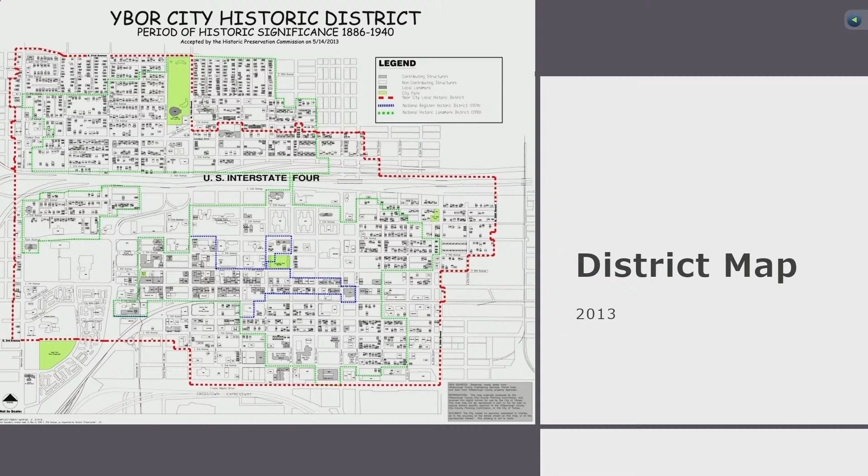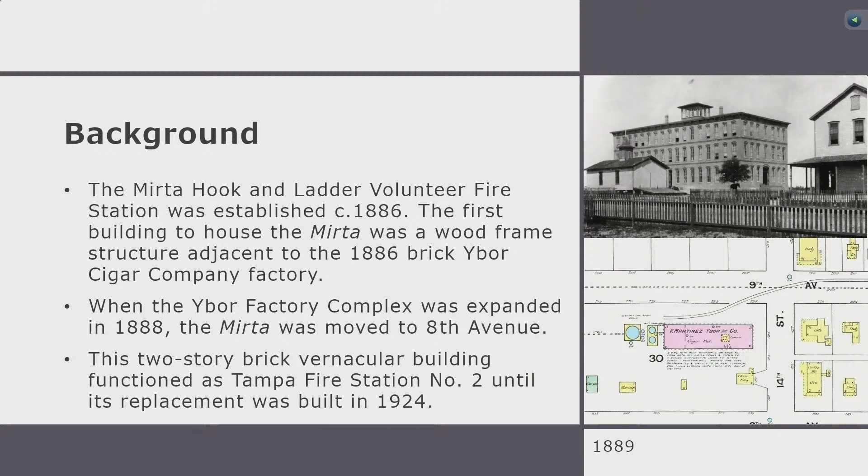When the Ybor factory complex was expanded in 1888, the Mirta was moved to 8th Avenue. This two-story brick vernacular building functioned as Tampa's Fire Station Number 2 until its replacement was built in 1924. It was later used as a cigar factory and warehouse, and Fire Station Number 2 is significant as the oldest remaining and only extant 19th century fire station in the city of Tampa.

And that is this month's preservation progress. You can also see it in our Tampa Bricks and Mortar newsletter if you want to read more about it as well.

I don't think it's by coincidence that that fire station was located right across the street from the Ybor factory complex. It was by design, so they wanted to make sure that that was taken care of.

With that, we can move on to conflicts of interest and ex parte communication, and I'll ask our legal counsel to lead that discussion. Hi, Dana Crosby Collier from the Legal Department. This evening, I'd like to ask if any member has a conflict of interest with any item on the agenda tonight. No. Okay, great. And has any member had an ex parte communication regarding an item on the agenda? I have not. Okay, thank you very much.

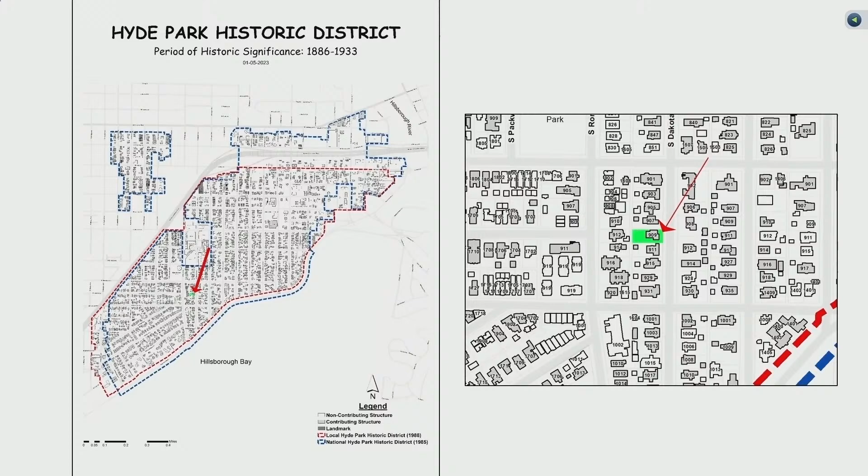909 South Dakota is located on the west side of Dakota Avenue, mid-block between West Morrison and West Watrous Avenues. The property is a contributing structure to the Hyde Park Historic District. From the 1929 Sanborn map, this shows the original footprint that has little change, and the original accessory structure, which has been demolished. You'll also notice that it has the open alley, which remains open today.

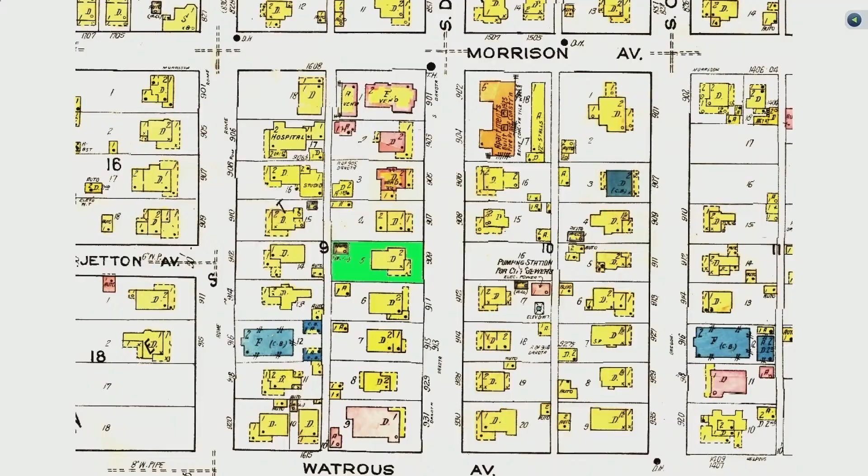The applicant will review the request for the ad valorem tax exemption. If you have any questions, I'm here to take them.

Good evening, Commissioners. Jim Lloyd with Lloyd Craftsman, representing the homeowners, my clients, Andrew and Kim Cox at 909 South Dakota Avenue. Appreciate you coming out on this nice dry day for this packed house. We've got a pretty good candidate here, I think, for the tax exemption.

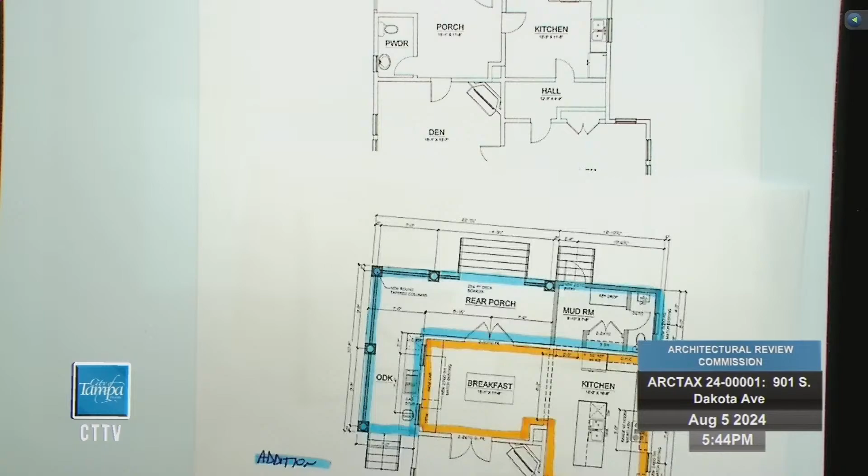Pretty standard layout. This is the proposed floor plan showing the area in orange that's going to be modified. So the kitchen will essentially stay in the same location, but just be enlarged. The back porch that's open right now will be enclosed and will become a breakfast area. And then there's a small addition for a mudroom behind the kitchen, and then a rear porch for them to be able to hang out on the porch, and a small outdoor kitchen on the south side of the home.

Excuse me, that's the existing second floor. Again, pretty standard layout. This was a sleeping porch that's been enclosed for another bedroom that was already there.

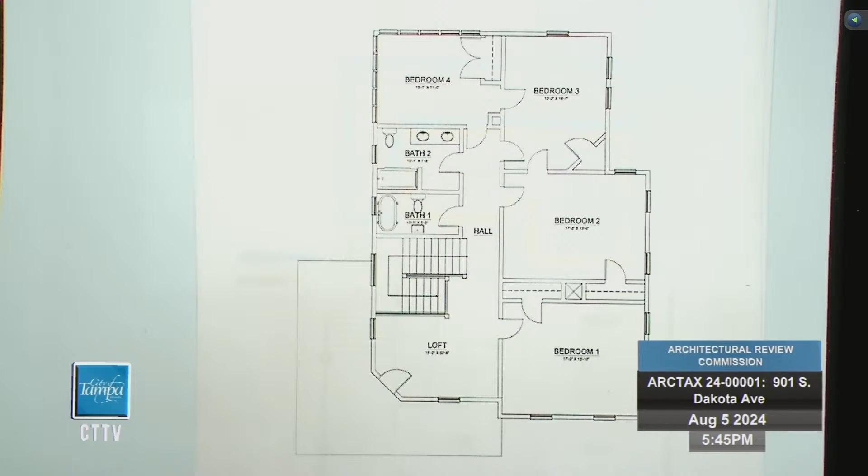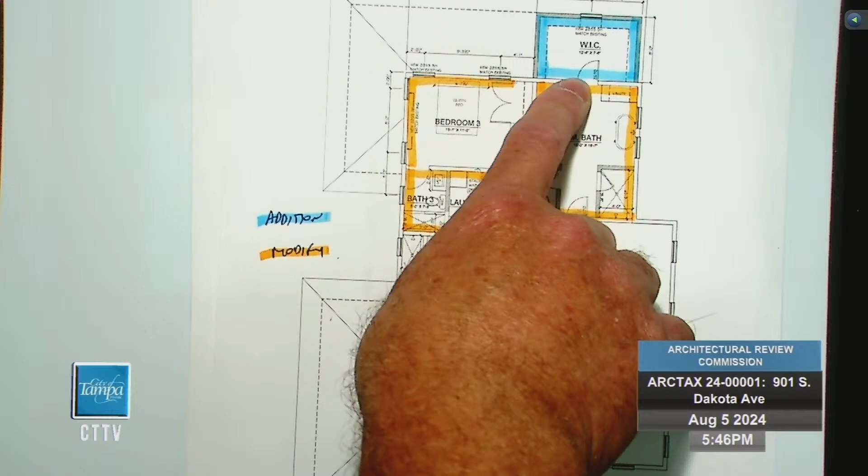And then this same thing, this is what's proposed for the second floor. Utilizing there's a bath and taking a little bit of space out of this room right now to create a laundry room upstairs. We are taking a couple of the windows out from the sleeping porch, but still keeping the exterior look of those windows just to be able to have room for a bed and a dresser in that room. The one bedroom is going to get modified for the bathroom, and then above where the mudroom is, there's going to be a walk-in closet on the second floor.

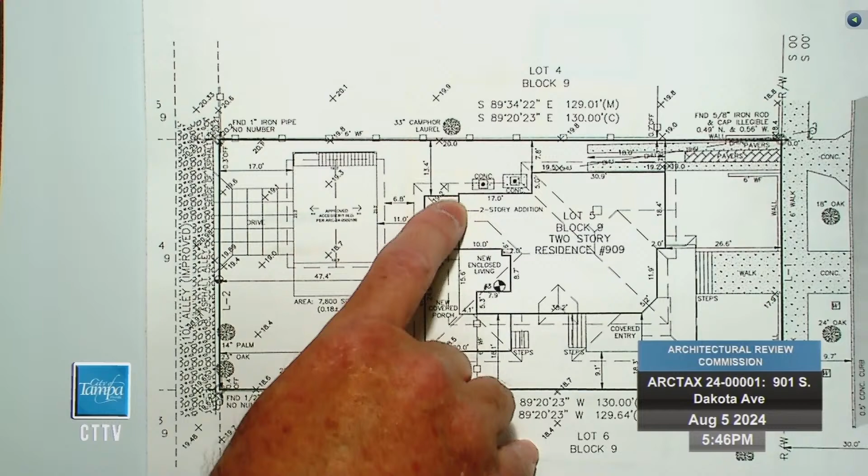Site plan. This is the proposed site plan showing the accessory structure that was already approved, the addition here that's already been approved, and how those interact. Shows the notch where we've taken where the addition is, so we can delineate new from old on this particular structure.

This is the front or east elevation, existing and proposed. Not a significant change. The only thing that we've really done differently on this is remove this door here and placed a window in its place, same scale and size as what is next to it on the second floor, as well as lining up with there's an existing window on the first floor, so they'll match each other. And then they are going to potentially utilize some space on the third floor eventually, so we did add some fenestration on that.

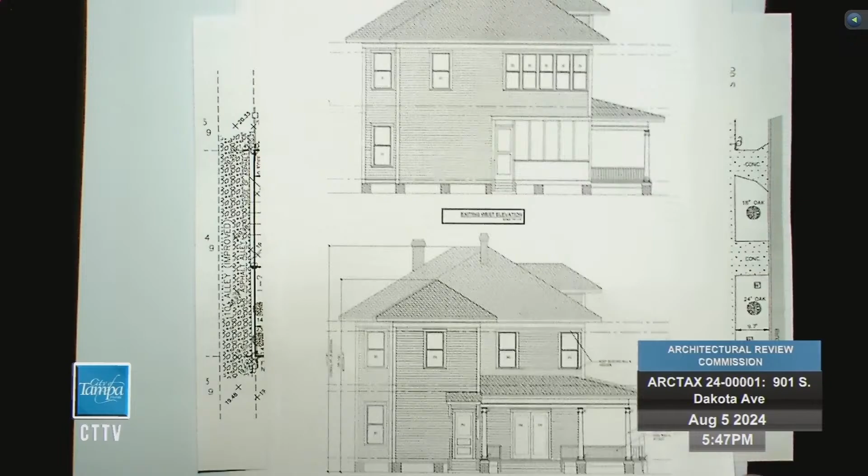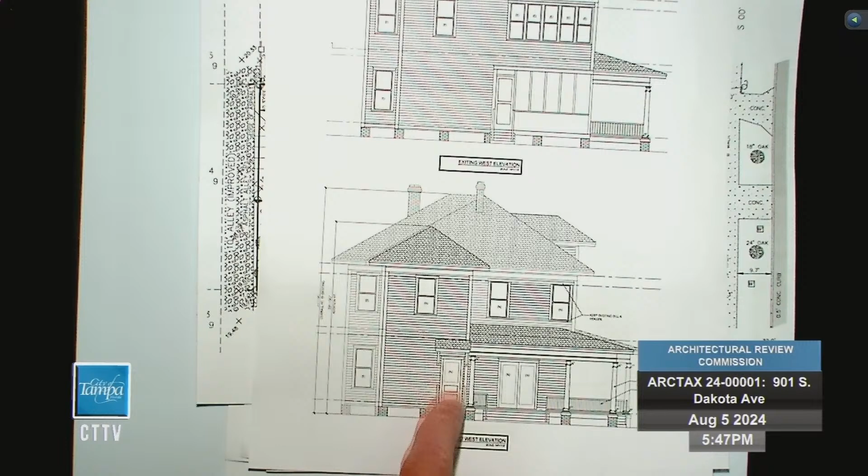The rear elevation, again, going from the sleeping porch to the bedroom up there. This is a sill that's going to be continuous, so it'll keep that detail that's there, but then we'll just fill in between there with siding, and we'll be putting new JELD-WEN wood windows in to match the existing residence. And then there's some details showing the rear porch, the entry door that's coming in off the mudroom, or that's going out to the mudroom, and some French doors coming out from the breakfast area onto the porch.

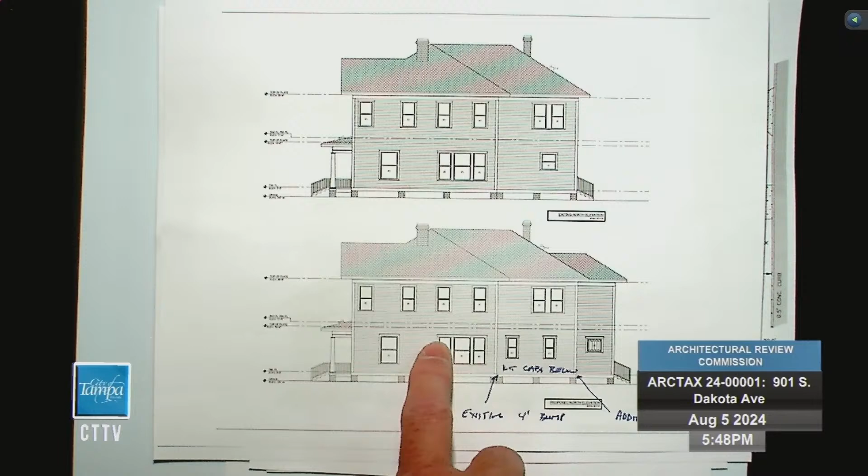And then this is the north elevation. Again, showing basically everything staying similar to what we've got. They are mimicking there's a window that's on the south elevation that they're going to mimic in the mudroom, just to give them a little bit of light in there. And then there was some discussion at the last hearing about the size of these windows, but there are kitchen cabinets below. The headers do line up. This bump out is, or this bump in is actually 4 feet behind this wall here. And then again, the addition has the additional 6-inch offset.

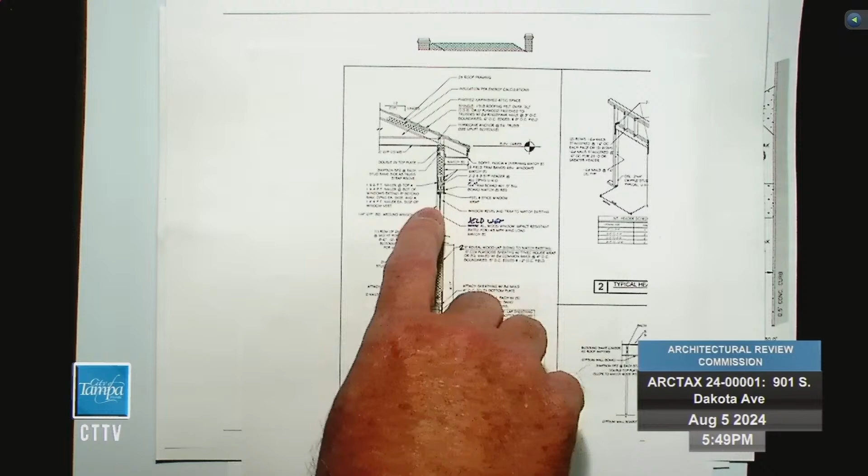There's a section view. Again, showing the enclosed soffit to match existing. The engaged windows, JELD-WEN wood window. It's a 2.5-inch reveal Dolly Varden square lap siding. That will match a 1-inch by 4-inch trim band going around all the windows, and then the corner boards showing the same thing on the first floor as well. So that's all mimicking what's on the existing home.

All right, so some of the details of the home.

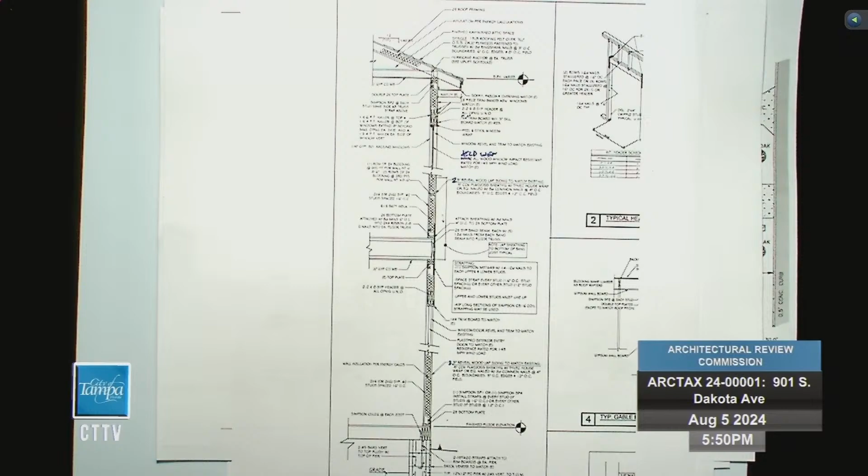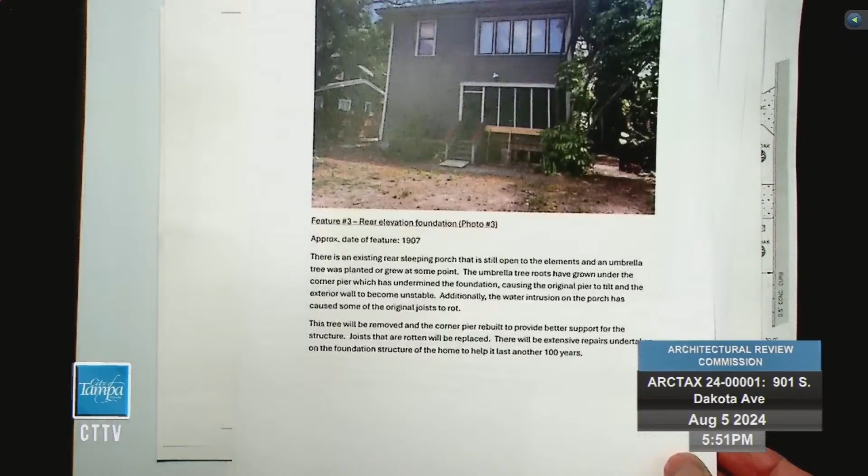The rear of the house. It's an existing sleeping porch, still open to the elements. This umbrella tree is going to be removed so that we can do foundation work there, so that we're not having any issues with it.

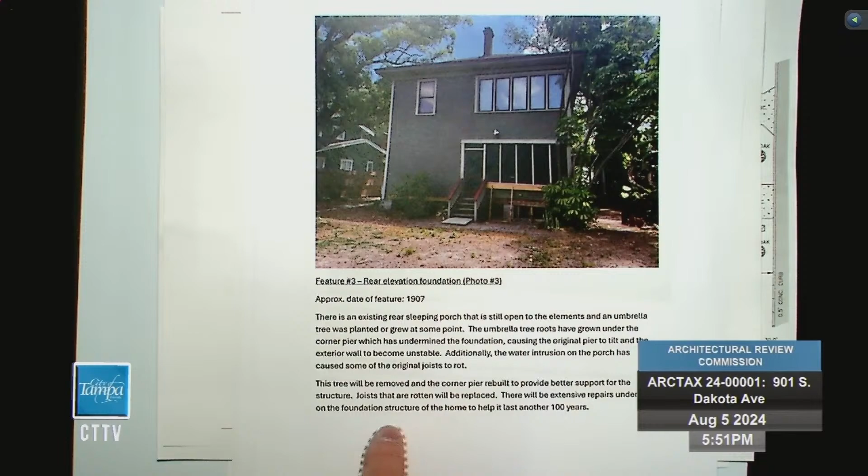There's actually a kink in the house right now creating a situation, so we're going to repair this corner of the house, the structure there, to shore that up. Some of the existing joists have rotted from water intrusion on this porch because it's screened as it is. So we're going to be repairing all this and taking care of whatever foundation work we need to make the home last hopefully another 100 years.

These are the existing original windows on the house. Most of them are original, and a lot still have the original wavy glass. These are going to be rehabbed and made operational again. Any sashes beyond repair will be replaced with new cypress sashes of similar dimensions, so they'll look the same.

They'll just be new and will last a little bit longer, hopefully, than what these had. But most of the windows there are actually in pretty good condition.

This is the door to nowhere. We've discussed this in the past, but we are going to take that out and replace it with a window. You can see the head height doesn't match the original house. It's debatable whether that was added or not, but this window we put in here will match the others that engage the frieze board.

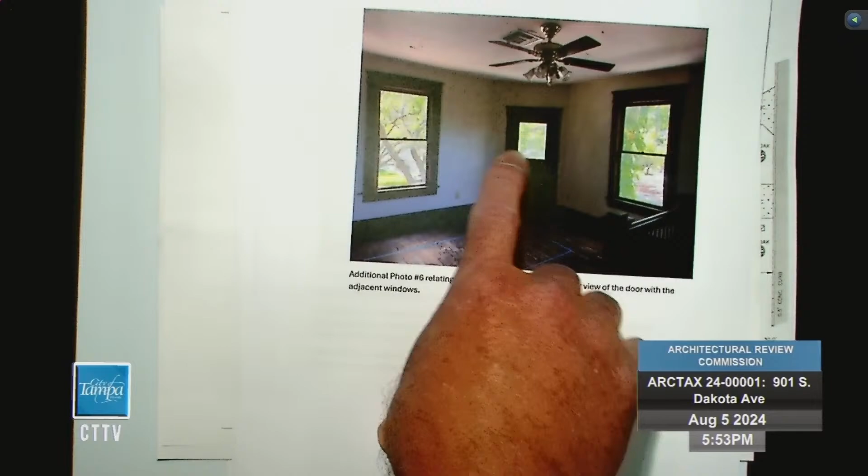Moving interior. That's just another photo from the inside, so you can see how this looks a little off here because the window height doesn't match the door height.

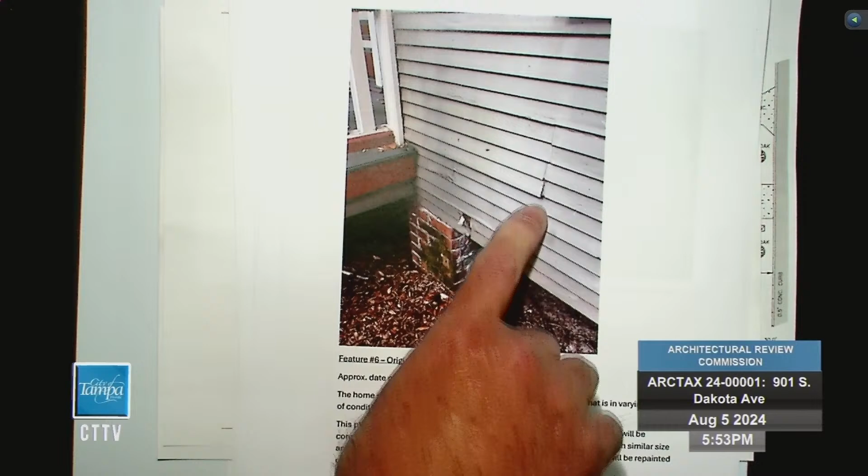This shows the original Dolly Varden siding, 2.5-inch square lap siding. It's in various condition, but this is a commodity item that I can get. We'll be rehabbing as much of it as we can, scraping down, cleaning up, fixing, and repainting. But if it's not in good condition, too rotted, we can get matching siding that'll go right in, and you won't be able to tell it's been replaced.

There's also some foundation work that we're going to need to do. That's the original brick piers that we're going to replace with additional brick piers, and that'll match on the additions as well. We'll be doing the same type of brick there.

That's the original heart pine flooring. This is the first floor, which is surprisingly in better condition than the second floor. So this can be refinished, and then what we're going to end up doing with the second floor...

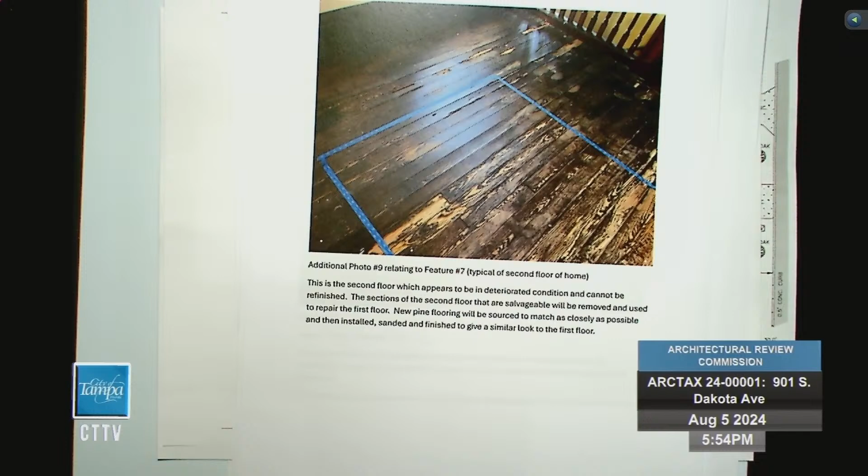There's some other photos of it as well. It's been patched over the years, so it's not in great condition. So what we're going to try to do is salvage whatever we can from the second floor and use it for patches on the first floor, because that will match.

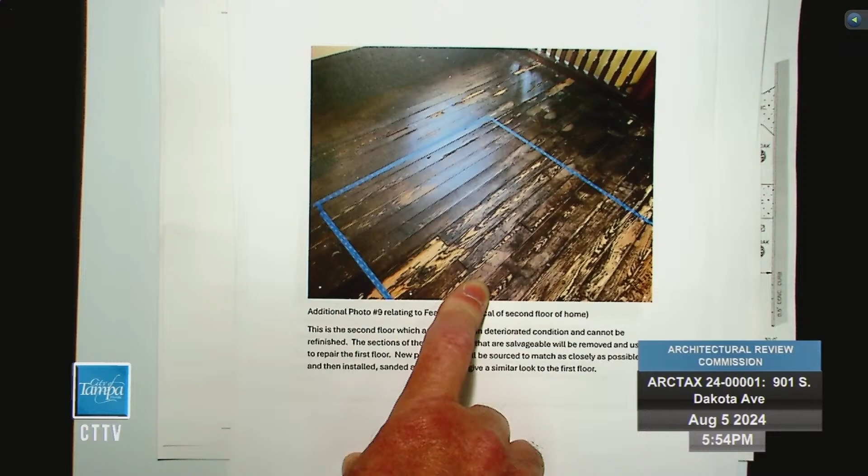Then we'll source additional heart pine flooring for the second floor and just replace that whole thing, because there's enough termite damage in the wood that it's going to need to be done. So we won't be able to salvage everything from up there, but we'll save as much as we can from that second floor and use it on the first floor.

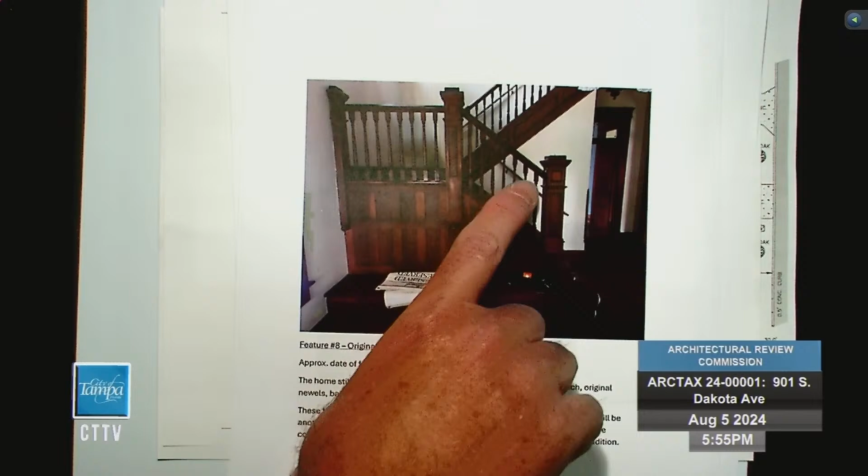This is probably the coolest feature in the house. It's a pretty spectacular stairway going to the second floor with paneling details, paneled newel posts, some really cool detail balusters, and a big fat handrail, which is typical of those homes in Hyde Park.

So this will all be refinished and refurbished, and we are also going to recreate that same look going from the second floor to the attic space. There'll be a switchback stair on the second floor matching these details to get up there. The third floor attic space is going to just be kind of an open room right now.

There's enough space to be able to get up there, but there's not a plan for any kind of detail as far as what's going to be up there, but we do want to be able to put the stairs in there now for future use.

There's another detail on that showing treads and risers, and then another shot of the balustrade. This is the balustrade on the second floor, overlooking the stairway.

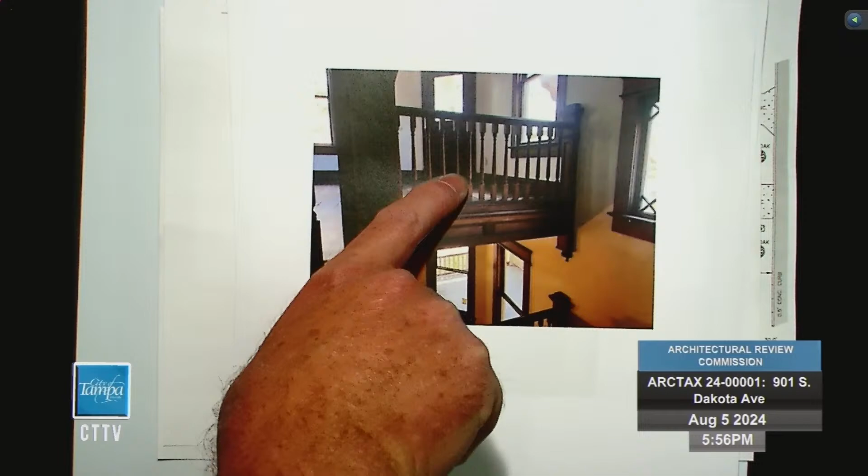So this will stay, but then there'll be another set of stairs going up with a landing above, and the landing actually ends up above that leaded window on the second floor, or on the first floor landing. So we'll be able to keep that in place and be above it with the landing going to the third floor.

There's another photo of that, similar style as I said. This will be the area where you're going up to the third floor section, coming back.

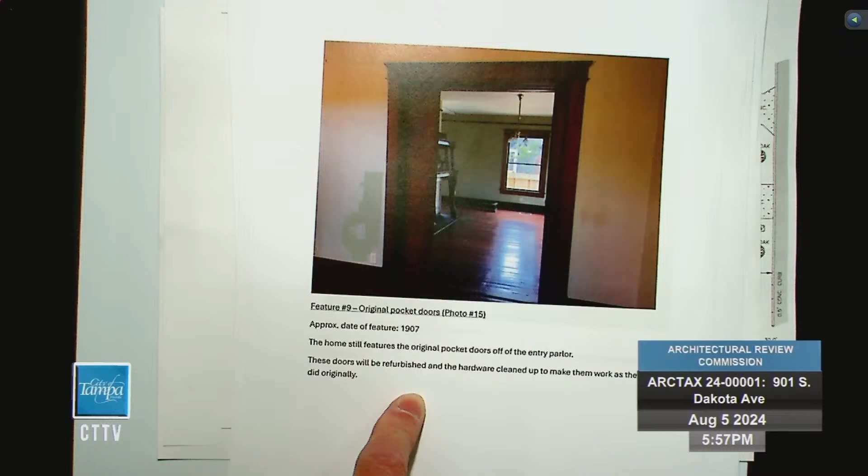These are some of the original pocket doors in the home. They'll be refurbished, hardware cleaned up, to make them work as they did originally. We've done a few of these on other houses in Hyde Park, so they come out pretty well and operate much better than they used to.

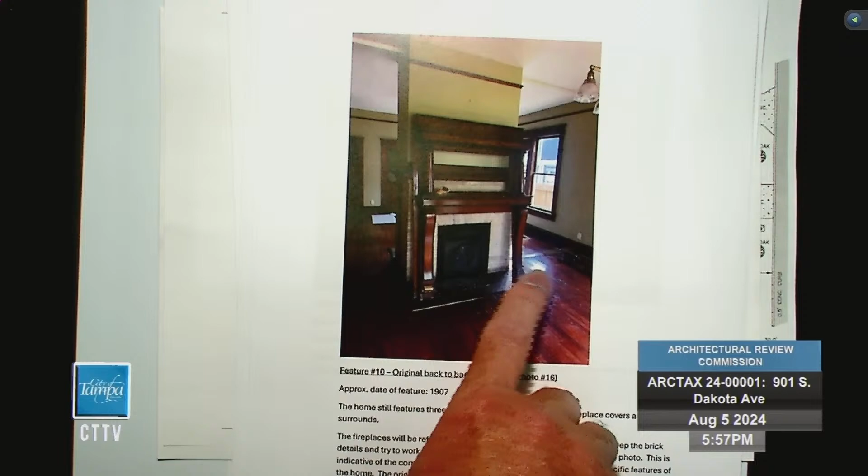These are back-to-back fireplaces in the living area. This is not an original mantle - it's something the clients had just leaned up there, but it's something along those lines. I think they got that at Schiller's. Whatever details we're doing in the home will be keeping with what was existing and what was there.

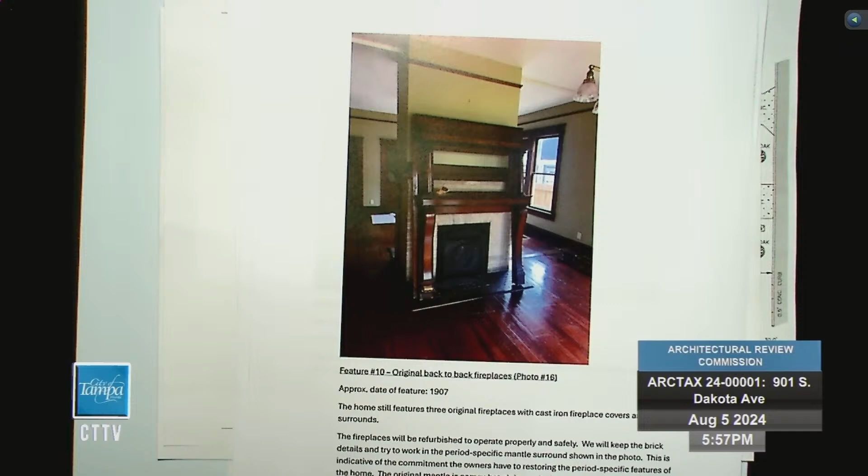That's the baseboard and casing, and there's plinth blocks in there as well - some of those original details that we're going to be keeping as well.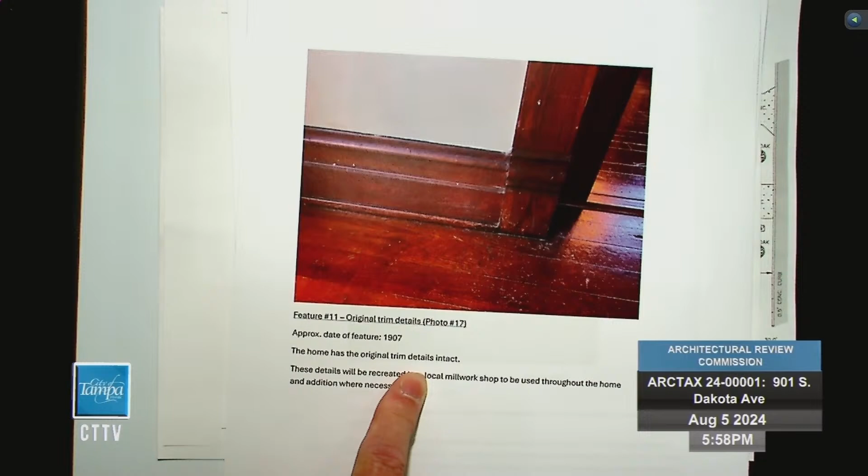Windows that we'll be refurbishing. Mr. Lloyd, how many more do you have? I think everything else, there's a door. Yeah, as you can tell, it's more so just to show you all that there's a lot of existing details in this home that we're going to keep.

Then, when we go to do the addition, we're going to be remaking the trim. I have a custom door guy that'll make the doors to match. So anything we need - if we're taking a door or casing out of a different part of the house when we're doing demo - we'll be saving that to reuse in the additions, in the new spaces.

The other photos are really just not good-looking kitchens and bathrooms that we're going to be replacing.

So I'm not sure, what's timing-wise? What am I done, or? You're out of time. That's all, all right. I was asking. Okay, all right.

I do have some other information on shingles - it's a shingle roof. But I think I've gone through everything else that's on there. I think we've talked about the garage door and the other door materials when we discussed the approvals for the garage and the main structure. So if y'all have any other questions, I'm happy to answer those.

Great, thank you very much. Sure. Staff? Do you have any questions for staff?

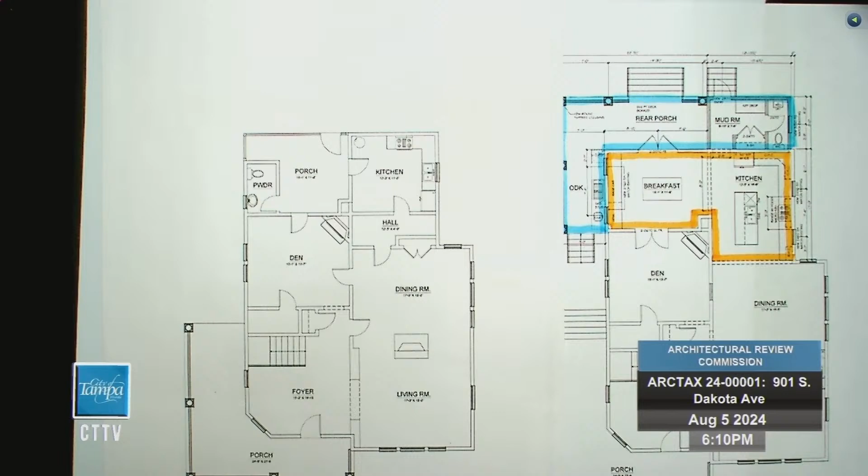Originally, I think when I first wrote this, this was a single door going into the breakfast nook, which I thought would have been a really cool spot to take this and move it over. But now that they've done double doors, it may be a situation where I've got to recreate another door, or take a door from another part of the house that I can put in there to make a double door. And then I would take the transom, remake the frame, and make the glass wider, but utilize the same mechanism, so it's got that jalousie, awning-type opening. So yeah, that would be the plan for that.

Okay, I just wasn't sure where that door... that's where it was originally planned to go. We were just going to take it out from where it is and put it in here, but they wanted to have a wider opening going into that breakfast area from the den.

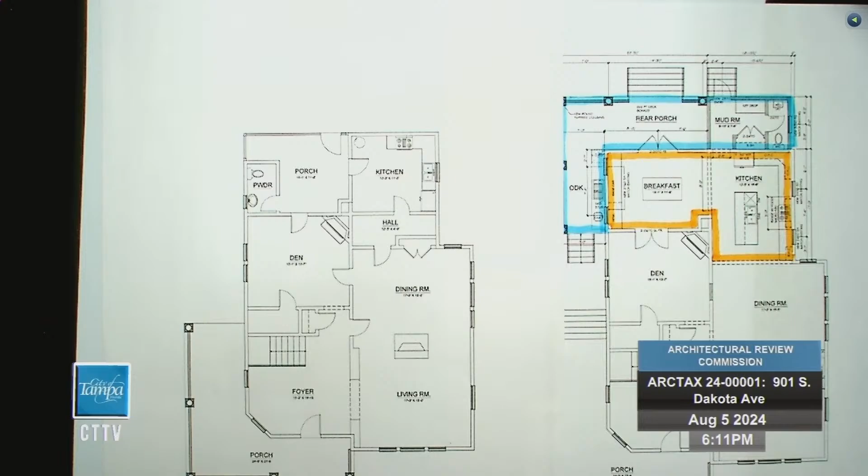Mr. Lloyd, the interior wall materials, for example right where you were talking about closing that wall, I'm assuming it's all plaster walls. It is, yes sir. So what material are you... we'll use drywall. We've done some plaster stuff before, but it's getting harder to find craftsmen these days that can actually do a plaster finish and make it where I can't see it. So we've done probably twenty major renovations in Hyde Park.

And we're pretty good with matching drywall textures. So if needed, sometimes the plaster will have a little bit of a stipple to it. I hate to say the word orange peel because it just gives me the heebie-jeebies, but we have a way of spraying a little bit of texture on it to give it that same look, and we've been successful with it in the past. Wait, same question with the hardware and lighting.

Mm-hmm. And you ran out of time, so I don't know. Do you have all your?

So lighting, we actually have done one of these ad valorem tax deals on a house over on Orleans a couple years ago, and we were able to reuse the same hardware that we took off some doors that got moved. I think we only had to buy maybe 2 or 3 pieces of hardware. I haven't done a door count on this to see where we're at, but if we need more and don't have enough hardware, I've gone to Schiller's before to see what I can find, and I've actually been successful finding some of this stuff.